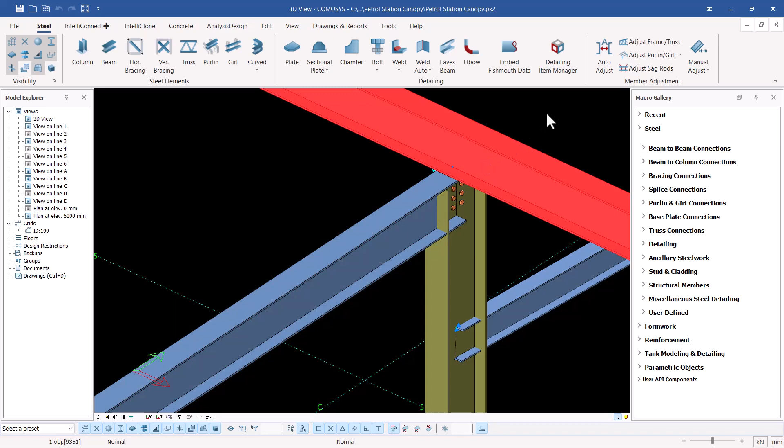Hello, welcome back. Take a look on the screen here, you can see we've made quite a step, and we've placed a secondary member there and a secondary member there. One thing to show you: the connection here of the secondary beam is not right placed. It's supposed to link up with the secondary beam on top here, so when we create a connection it should be accurately connected to the upper one, but that should not worry you.

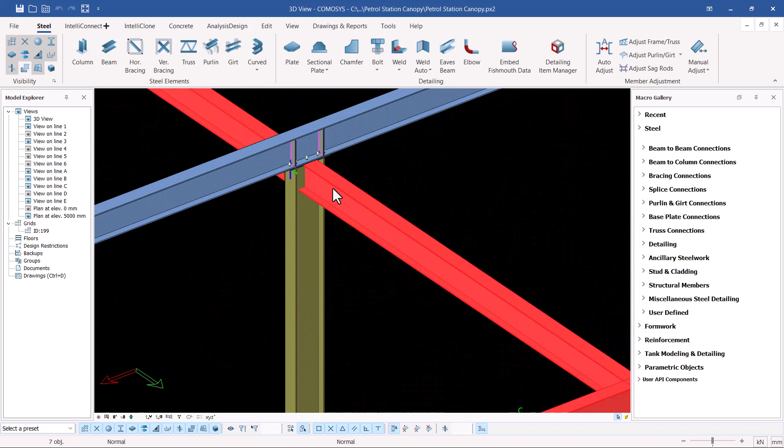Now, prior to giving it an offset on the other end, we want to select everything and take it to the right position. So I'm going to select all these. I'm going to press Control and select this, and select that, pressing Control to select every member that we intend to copy or move up. Once we've selected everything, I'm going to press Control W and take it up like that.

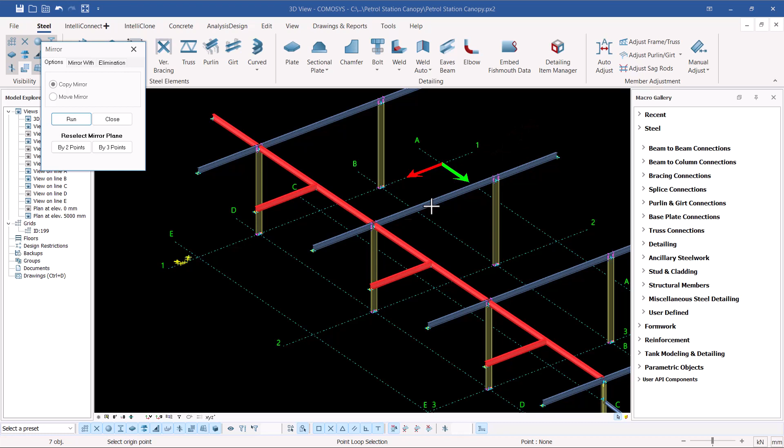Now, once I've done so, I'm going to give it a mirror command to copy the same components on the other end. I'll right-click and come to Special Copy here and pick on Mirror. So once I've picked on Mirror, I want to define my mirror line right in the middle here, a mirror line right in the center of this member and to the place you intend to copy this. So the middle point would be from this end to this end, or on grid C here. I'm going to define my mirror point from that spot to this spot. Once placed that way, this is my mirror, and this will be mirrored or copied on the other end.

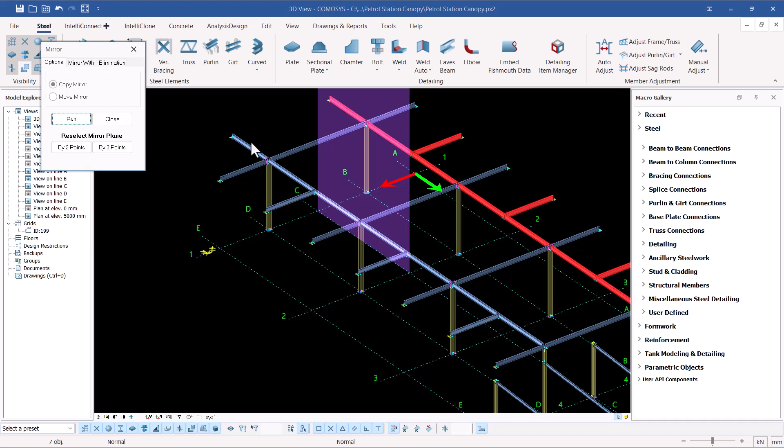So if I go here and click Run, everything I've selected will be copied on the other end. If I right click, hold my mouse, and move my mouse like that, I'll be able to see that I've copied everything on this far end. So if I click on empty screen, I'll be able to deselect everything.

Another thing, I'm going to copy this member, this one here, these members here. I'm going to select on that, and what I'm going to do is copy it right at the center here. I'll right click once again, come to Special Copy, and pick on Linear. Once I've done so, I'm just going to snap either the center there to this midpoint here, because it's exactly where I intend to place it, snap there, and come here and invoke, authorize, or give an OK to the copy command and click OK.

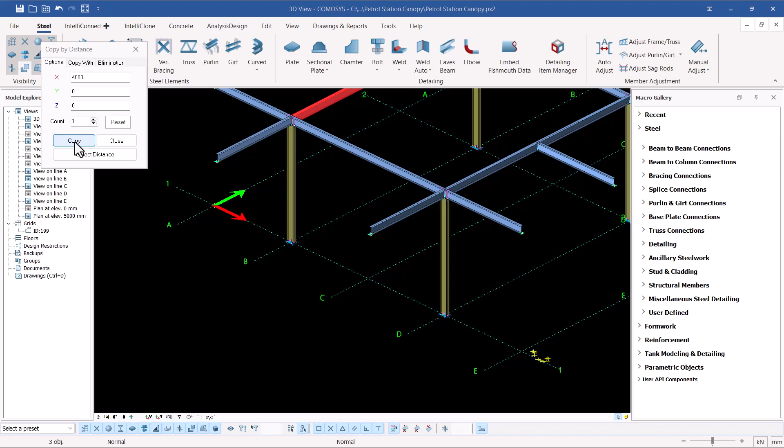Once I've done so, I'll be able to see I have my member in place, already copied right there. Let me turn it, and there we are. Everything is in its right place. Now the next thing remaining is just to create connection.

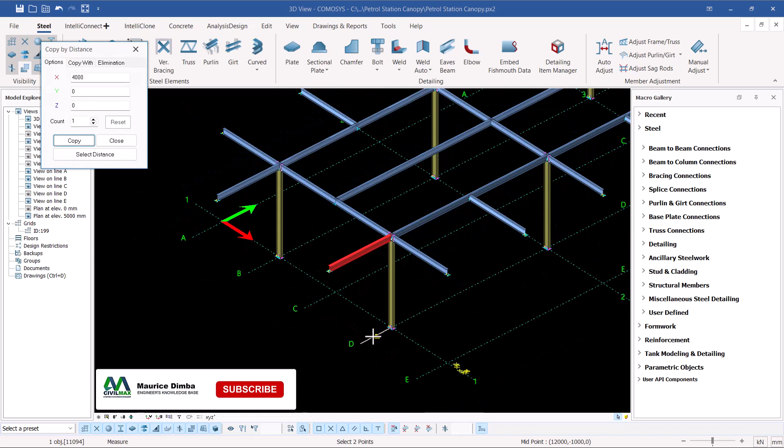So the next thing also, we have to copy this right to the center here. What I'm going to do is just select on it, and apply the same command or procedure that I've used to copy this member to the right, to the center there. So I'll select this member, right click, come to Special Copy right away, and pick on Linear. Then I'm going to snap right at the center there, then come and snap right there, just to define that we are copying by distance. That is the command we're using.

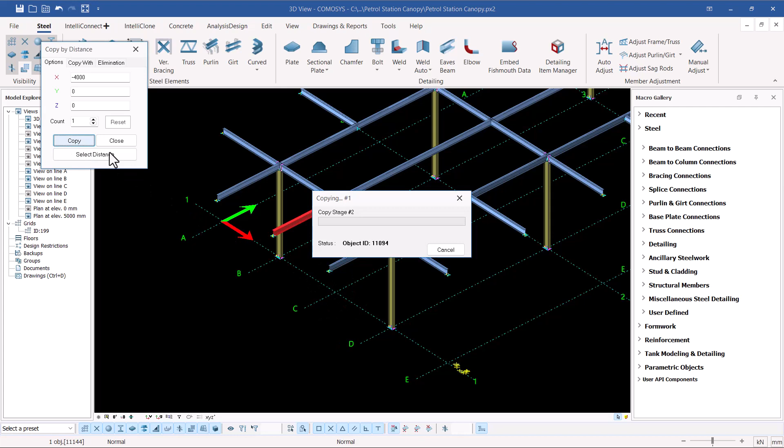Though there are other ways you can use to copy, in this option we are using copy by distance. So we have to define the distance, which is 4 meters, and I'll snap there. Once I've defined my distance, I'm going to give it an OK by clicking copy. Once I've clicked copy, that member will be placed right there. So I have these already defined in place.

So the part remaining is just to create connection between these secondary members here. You can see that member and that member, and this member here. So I think let's share that on the next presentation.

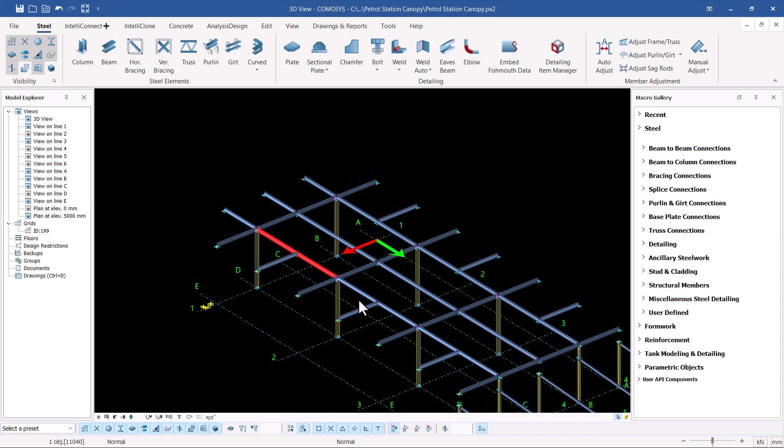I've just showed you some few commands on how you can copy, and on the end you can mirror that. There's another option, you can apply copy. Copy can also be done by selecting on this, then right click and come to Special Copy and come to Mirror, or come to Linear. Then you can use the XYZ and add the counts. You can also copy like that, and that's another option of using copy by distance.

So we have this in place. Let's meet then on the next presentation, where we'll be creating connection between these secondary members.